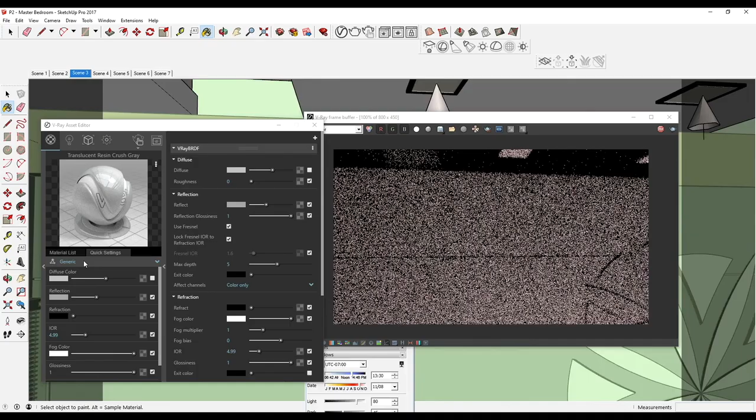Like that, and give it a glow just like that. So I'm not going to give it any color now, since we're just trying to understand light.

And let's just go here. So this is basically how the whole thing is going to kind of look over here.

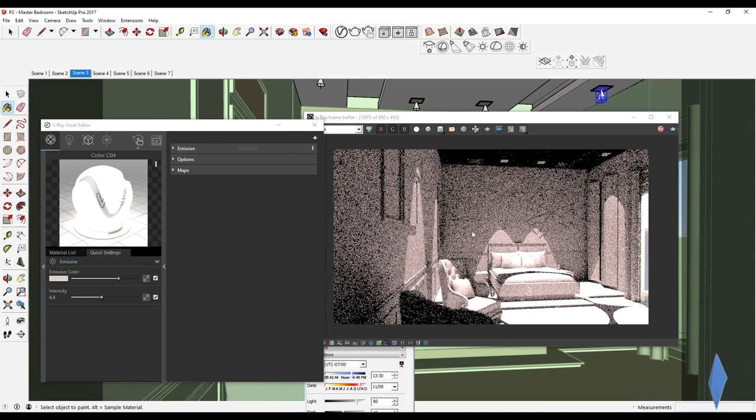So the next thing you want to do is simply go ahead to the spotlights over here and change their angles and things like that. Let me just kind of change one of their angles first. You can actually see all of them kind of just increasing and decreasing.

First of all, we need to increase that angle, but we need to even increase the penumbra angle so that it's mostly diffused light. Needs to be heavy always.

So something like this would actually make a lot of sense in the way the whole thing ends up looking. Definitely we can reduce the intensity as well, so it's not too much light, because you always want rooms to be quite cozy.

So you can actually see where the things which have not really reduced any light. So I'm going to set these at 0.75 and 0.60. I'm going to set this at 15. So we can actually see we have 15, 0.75 and 0.6.

What we can give these setups in the same everywhere. So this will be 15, that's 0.75, and that's 0.6. Again, that's 15, that's 0.75, and that's 0.6. Let's quickly go ahead and add all these everywhere over here.

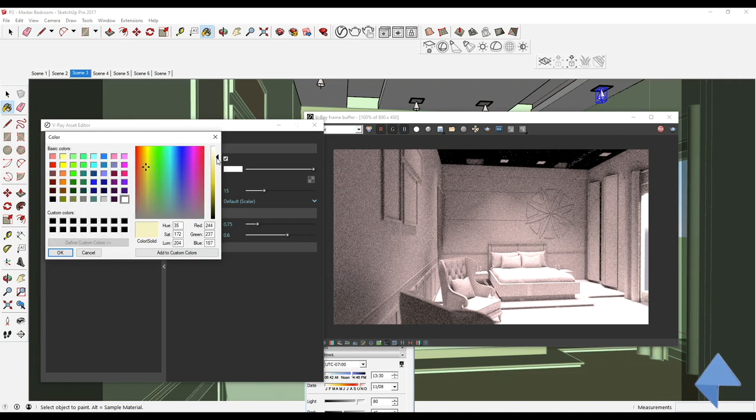We can definitely change the color slightly to a very light yellowish, light yellowish type color. I think that would kind of bring in an even better look. And if you guys are okay with this, then we can definitely go ahead.

But let's just reduce the light even further and kind of see how it's looking. What if we just have it at 10? Let's just reduce all of this to 10.

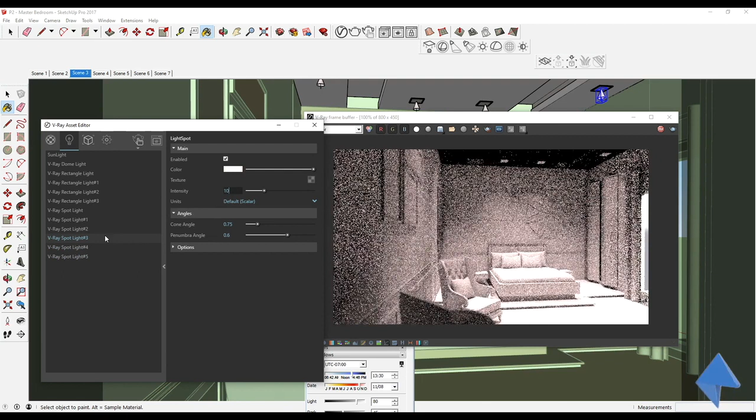Because I really think that the lighting, because there is so much light in the room, so many different lights in the room, the entire room is getting extremely lit up, and that's good in a way, but we don't need so much of light as well. And you can actually see this makes it look much more smoother, much more warmer, and the whole room feels much more nice.

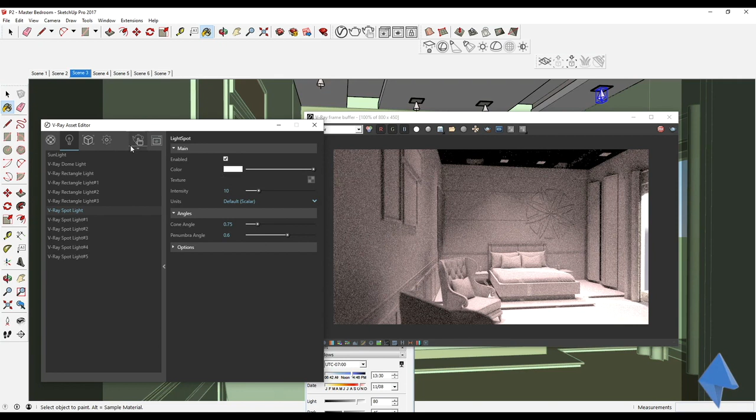So what I'm going to do is now I can actually bring back all the materials, if you want to see it, how it's kind of looking together. And this is somewhat what the whole thing is kind of coming out to be like.

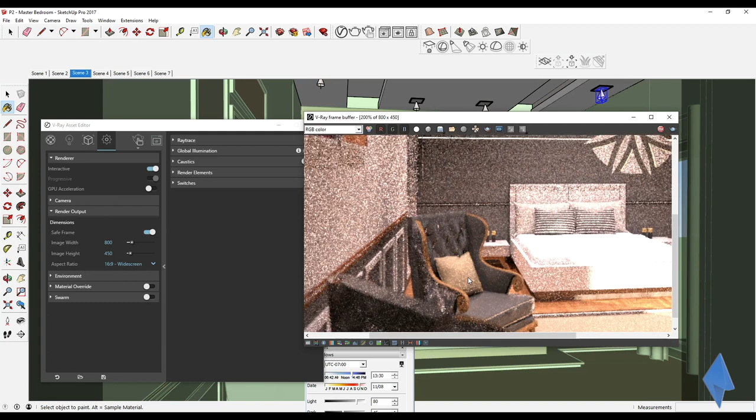Now, as you can see on top, the entire ceiling is actually getting very dark. We need to kind of have a look on that, but you can actually see everything else looks quite nice with all the lights on and things like that.

We still need to check out why the ceiling is giving an issue. So I'm simply going to click on the ceiling and see what that is really doing. So we can see over here we're getting all these kind of reflections happening.

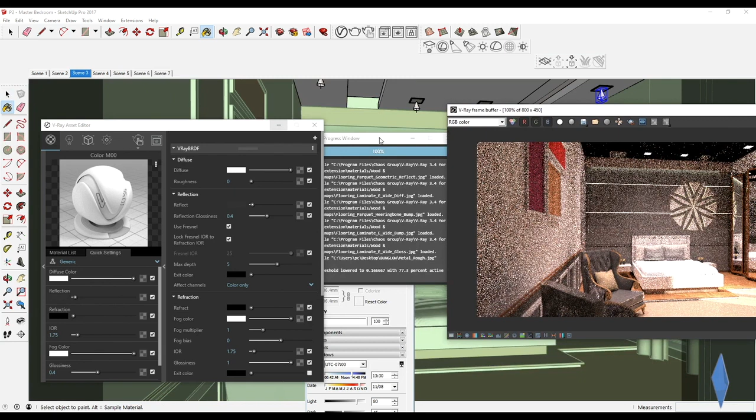Can reduce the IOR. Again, I don't really think there is too much of an issue with this, but if we ever find a problem in a material like this, what I prefer doing is simply going ahead and selecting another material, simply by just selecting a color, giving it any simple color like this.

Just selecting that color and just kind of putting that color everywhere over here. You can just have a look at how I've done that. And in this entire ceiling now, you'll start to see a couple of changes which would end up happening to it.

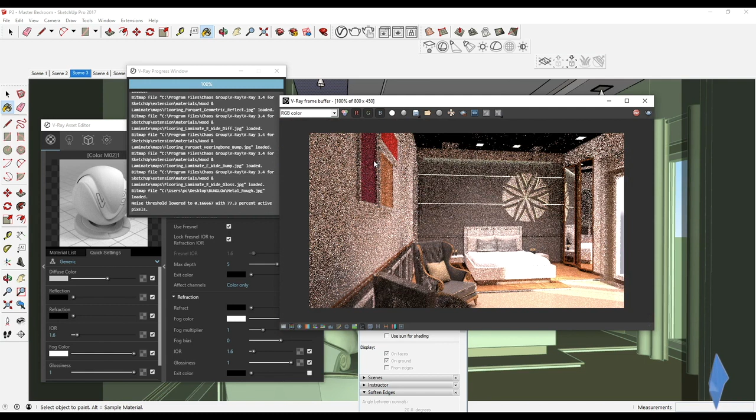Or we can even go into sunlight, and over here we can kind of change the whole thing.

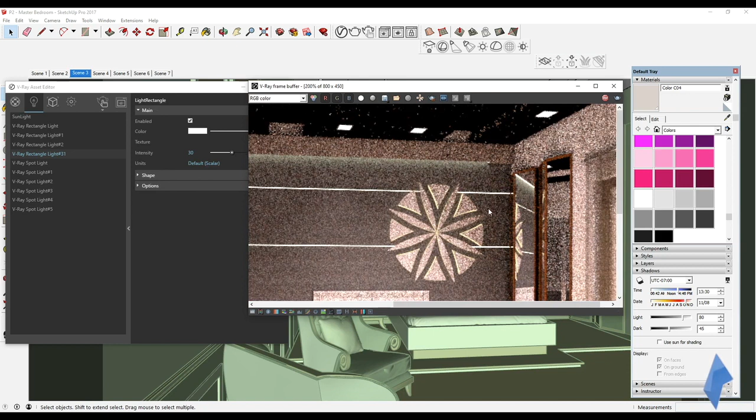So as you guys can see, we are facing a problem with the ceiling over here, which is coming up to be too dark, and also the lighting which we have added over here is not being seen.

But when such issues do come up to us, we don't have to worry. We have to actually understand why is it happening. Is it because of the shadow, or is it because of the timing?

So we might just make a slight change in that to kind of see if it's affecting the ceiling. And if we can see that, then you can see this light and dark as well.

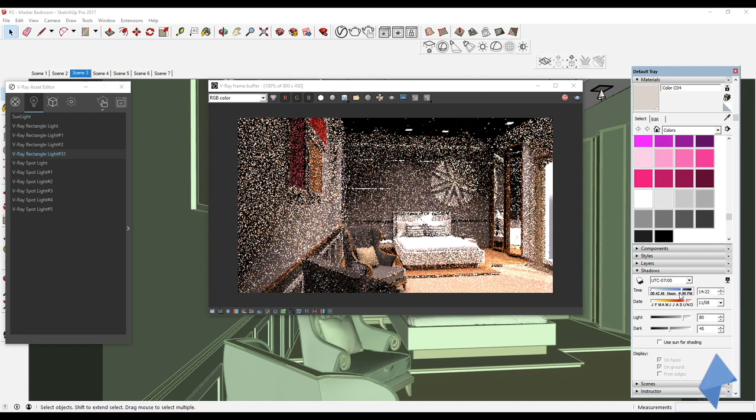We can actually have these changed as well. We can increase the light, and we can even increase this to see if there are any changes happening in this entire model. And if it's not, then we first need to add a couple of things.

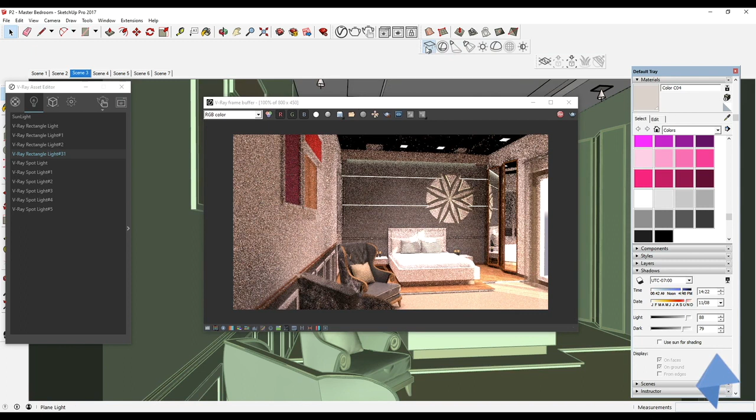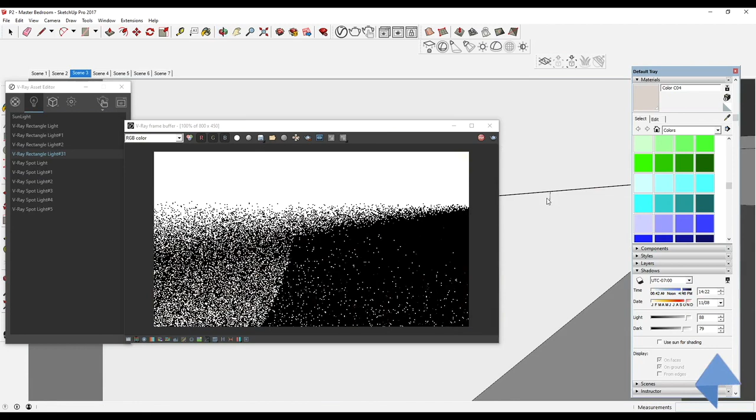First, we'll illuminate the concealed lighting with rectangular lighting rather than giving emissive lighting in this case. So for that, I'm going to jump up into this space and select the rectangular light, clicking over here and going all the way to that side, getting that placed down over there. So we got light coming in from here.

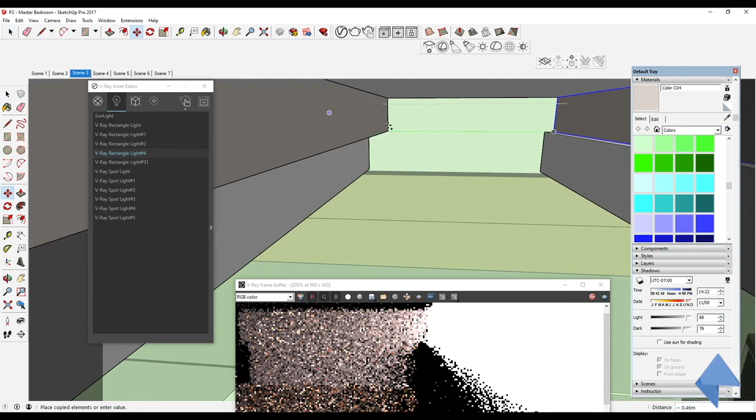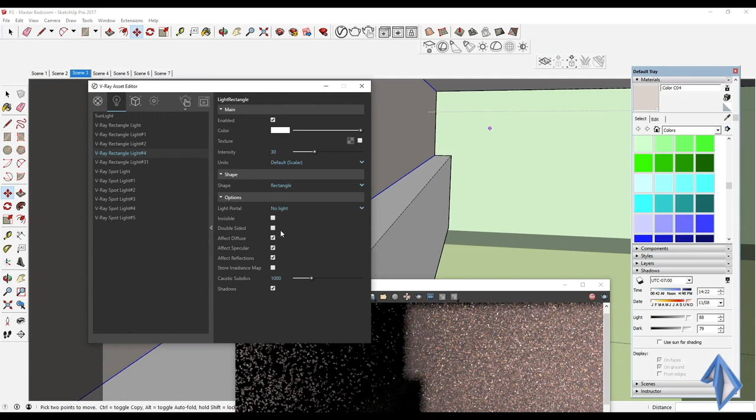Now we'll just copy this if we want. Select that, copy it from there, and simply place that over here. Now right click and let's reverse this face - so we do not have a reverse option, we can just flip it along the green side or the red side, or we can simply open up the rectangle light and go to options and make sure it's double-sided, so we have light coming out from both sides.

Now we can simply go ahead and copy this from here, take it all the way to that side and paste it over here. And now since it's double-sided, we'll be having light from both sides. Simply come here and place it as well over here.

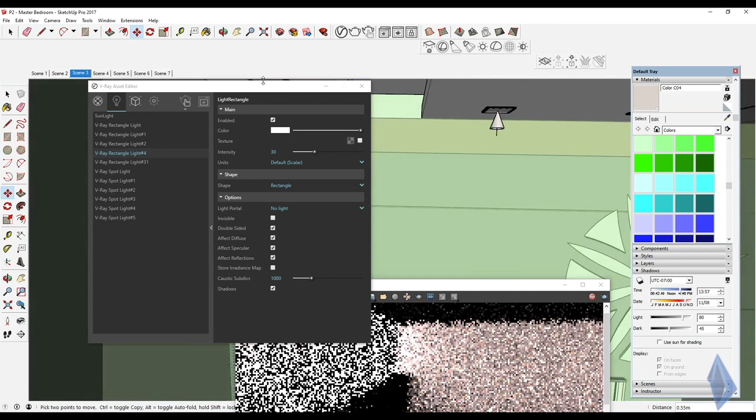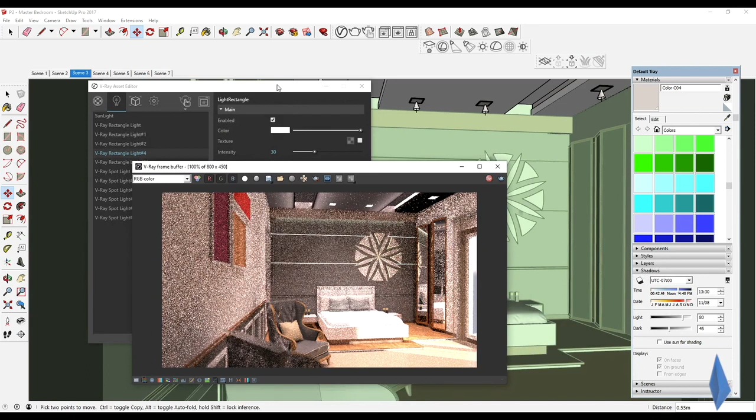Now let's jump back into our scene and have a look at how our entire view is looking right now. You can actually see because of those lights, we have improved the lighting of the ceiling as well. Still, this portion is extremely dull and there's no real understanding of why it's there. So what we can do is go ahead and do something very different - this is called manipulation, or image manipulation, that we do so we can have very good looking views.

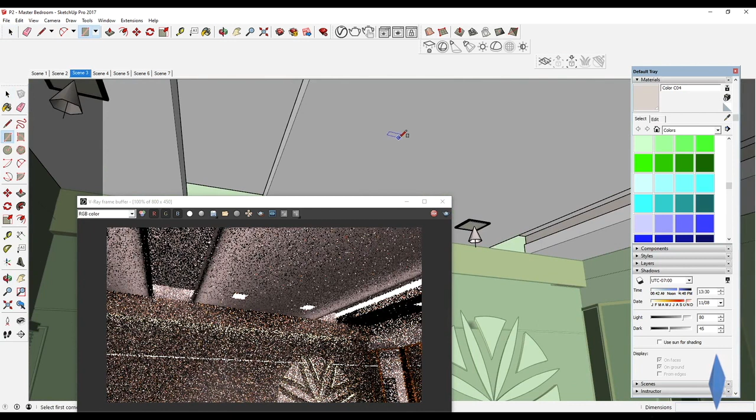What we're going to do is simply create a full rectangle all the way over here. We'll create a rectangle, and I'm going to be selecting from the rectangle list like this. I'm simply going to select this and scale this all the way - you can see in all four directions, there's going to be the whole room over.

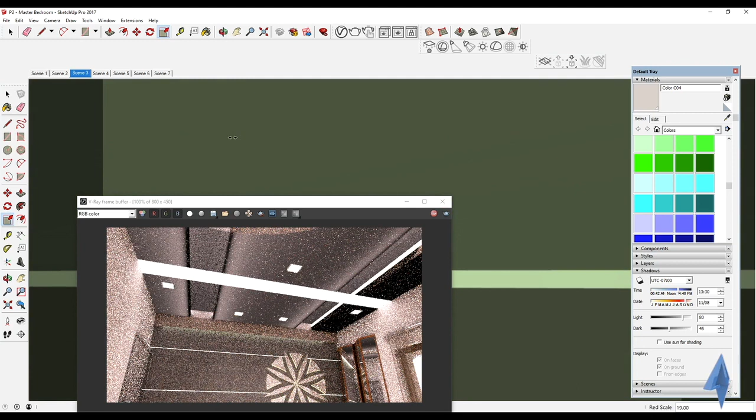This is called image manipulation. We need to do this sometimes when we're not getting the right look for our particular scene, or because the V-Ray engine is not really working the way it should. And that will go over here, and this one will basically come all the way till here, and that's how we're going to do it.

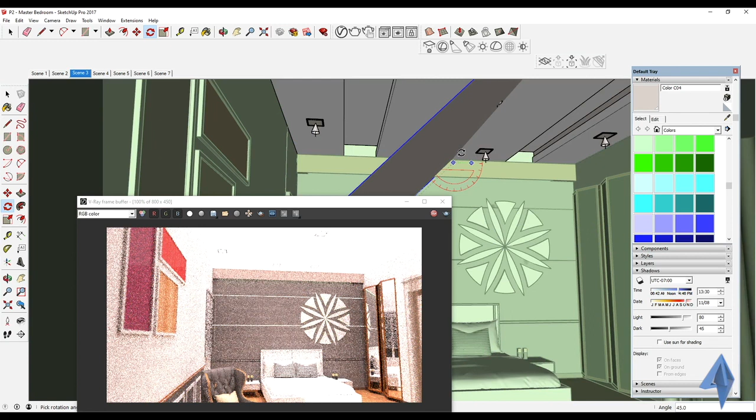Now for this, what I'm going to do is rotate this completely, just 180, and let's bring this back to place over here, something like that. And we're actually going to move this downwards like this.

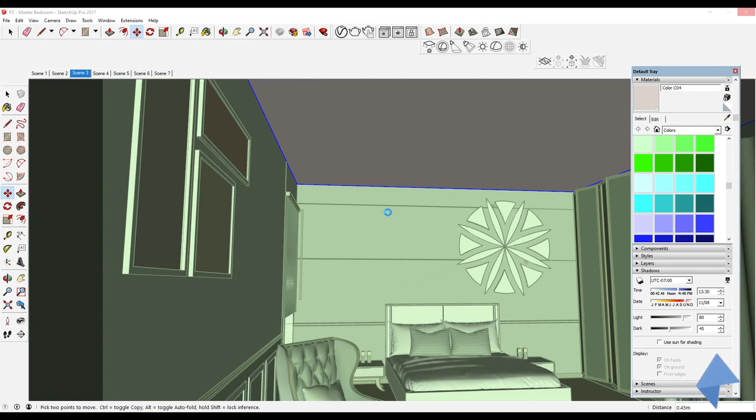Let me just close this tab right now because these things tend to get very heavy when you're trying to use so much of the resources all together. In the next topic, I'm actually going to show you guys how you can make proxies and then use those proxies to put out objects in your whole thing.

So let's just get that placed over here, and we'll move that a little bit down. Oh, we're selecting the whole thing now - no need to select the whole thing. Simply select that and move that downwards.

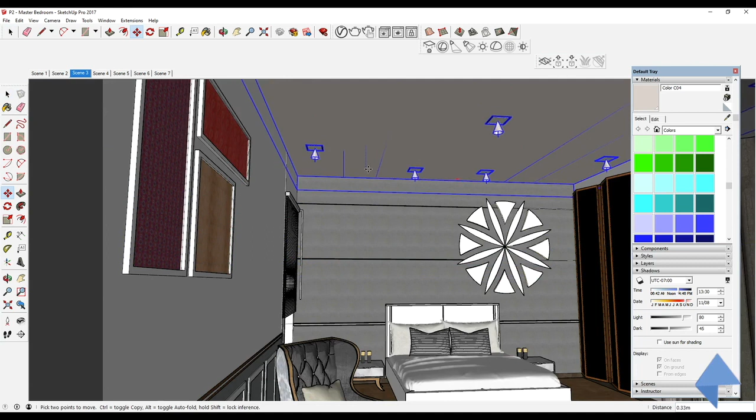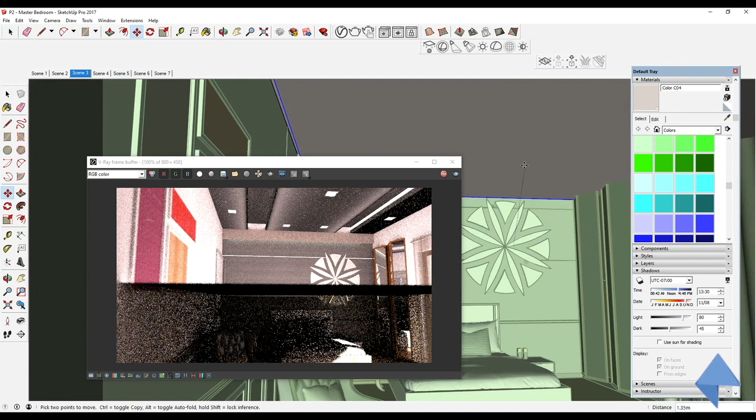Just like that. And what's going to happen, because we've moved this downwards, now when I click render interactive, you'll see how this whole thing is shooting light in the upwards direction. We don't really need to shoot light that much in the upwards direction. We can simply move this up just so the ceiling is getting lit.

Over here, what I'm going to do is keep my V-Ray asset editor on and go into options and make it invisible. And what's going to happen is, because it's made invisible, you'll see that this whole thing is not being seen - I'm shooting light in the upward direction so that this whole thing is very visible for us.

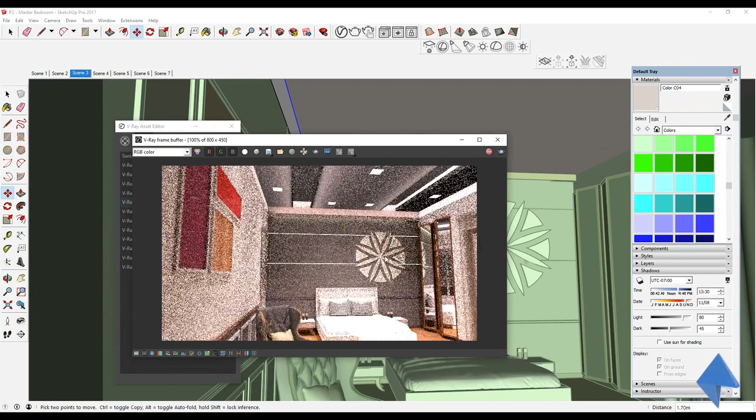At the same time, you guys will notice that this is still a little bit dark, but once it clears out, I think we'll be getting a good look depending on all of these as well. So that's about it, and I'll see you guys in the next topic. Take care.